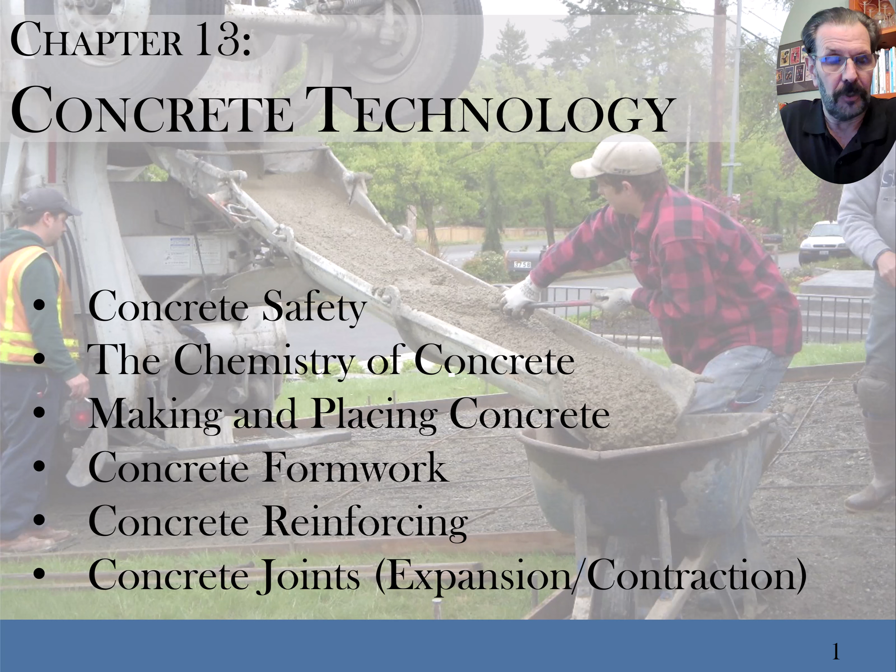Today we're dealing with concrete technology, maybe one of my favorite topics. We'll deal with concrete safety at first, a little bit, mostly in construction safety. Then we'll look at the chemistry involved in concrete—concrete is a chemical reaction. We'll deal with the making and placing of concrete, formwork and concrete reinforcing, and finally the jointing of concrete.

Concrete is not the same as cement. Cement is one of the ingredients of concrete. Concrete is a mixture of gravel and sand, Portland cement, which is the binder, and water. The Portland cement and water chemically react with each other to glue the gravel and sand together—it's the adhesive that binds all these parts together. The strongest concrete mixes have lots of gravel, some sand, and the Portland cement needed to bind all these materials together with the water. But if you add too much water, more than needed for the chemical reaction, you weaken the concrete. So you need a lean mixture as far as water is concerned.

Concrete hardens by a chemical reaction we call hydration. The Portland cement we use is a hydraulic cement, but the chemical reaction is hydration, or sometimes we talk about hydraulic reactions, because it's a reaction with water. There's actually heat generated by this chemical reaction too. It's not very measurable in day-to-day examples, but it is a true thing, and when you're running a very high-speed, quick-setting cement, you can feel the heat.

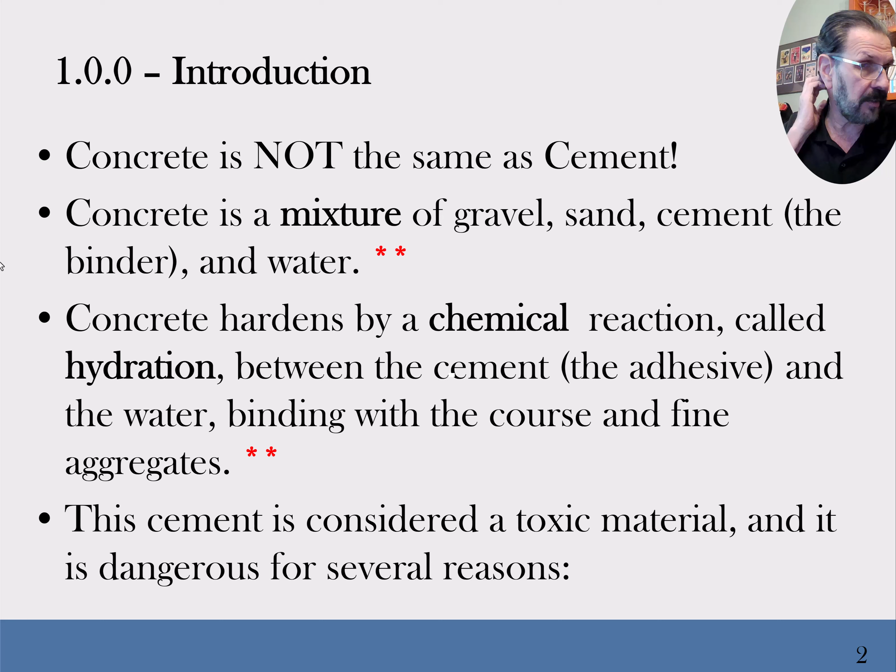Cement, in this chemical reaction with water, is also toxic to our skin, in terms of burning it. For most day-to-day exposures to concrete, it's not a matter of accidentally getting some on your skin—it's if you're leaning into it, if you've got a bunch of it in your boot or inside your gloves and you're holding that against your skin for a period of time, the cement can start reacting with the water in your flesh.

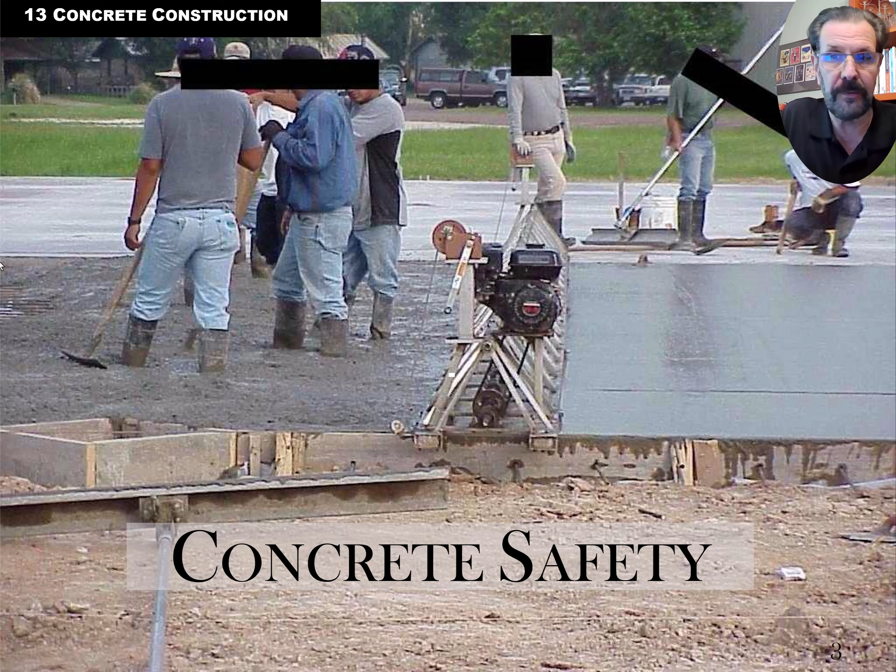Some people get irritant reactions to the cement against their skin, either the paste or the powder, and they call that cement dermatitis. If you're breathing the cement into your lungs, well, there's silica in there. Also, if you're breathing it in through your mouth or nose, where the moisture is at in the back of your throat or in your nose, you can end up getting chemical burns in the nostrils or the back of your throat from the same chemical problem.

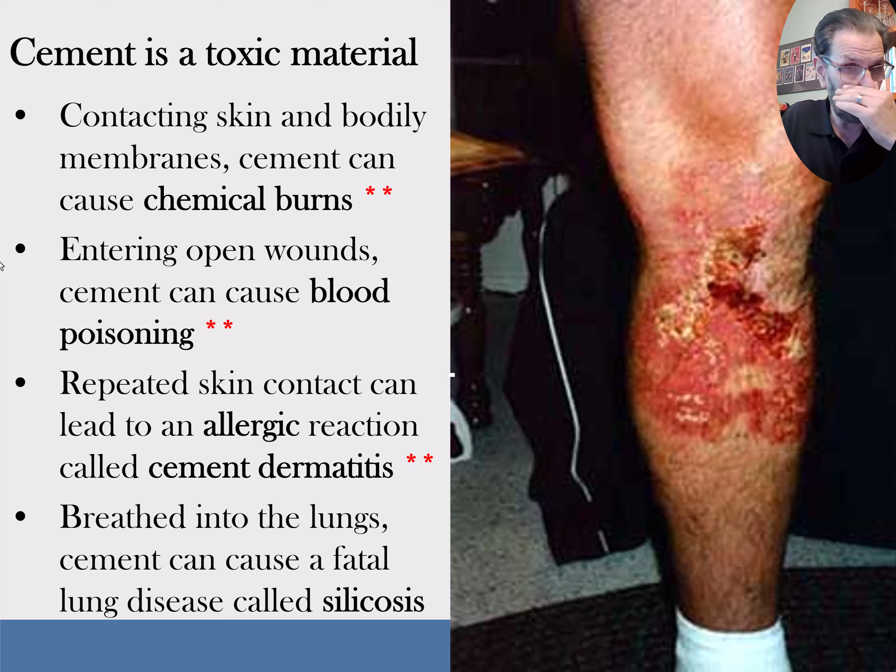And if you get any of this paste in your eyes, that can sting and hurt. So you've got to wear goggles, safety glasses, and maybe goggles depending on what you're doing. A concrete pump, a bucket, a concrete chute, or the vibrator can splash this stuff up into your eyes.

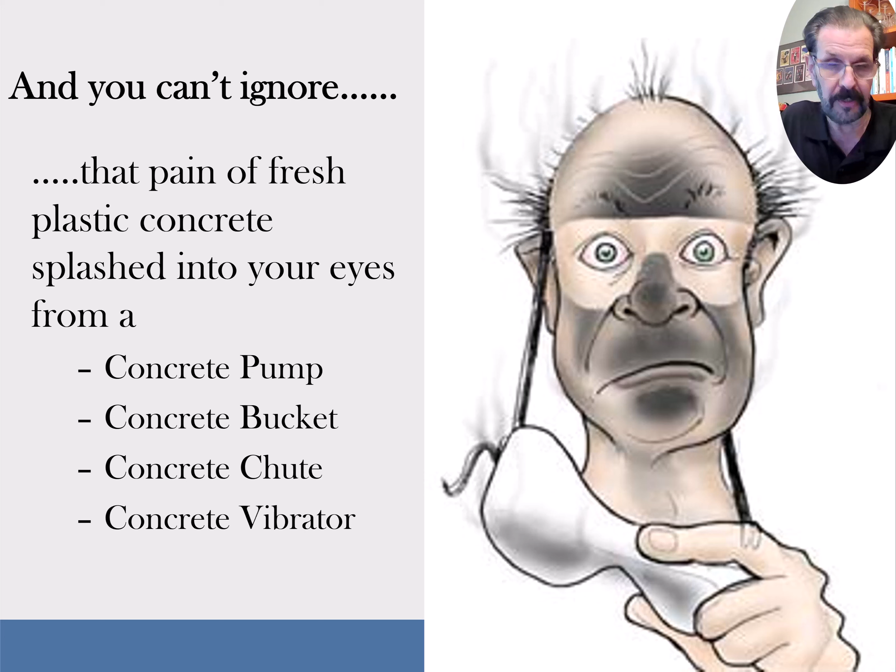The thing about concrete is that it's different than other kinds of activities we do, like welding and steel or woodworking and wood. This joinery is a little different than actually forming material—we go and build these temporary forms that have to be strong enough to support this material.

While it's setting up, it has to be easy to strip, so we need to remove those forms. Looking at these points, the last things about safety I'm going to talk about: the faster the concrete is poured, the greater the pressure on the forms, and those forms can burst. Rebar, reinforcing, you can be impaled by the rebar.

So then you've got the problem there, so we put plastic caps on the rebar. Tilt-up wall panels, lift slabs, precast concrete is all preformed concrete in some way that we're picking up and placing somewhere—what we call erecting the concrete—must be placed and braced properly to avoid collapse. And of course, because it's so heavy, when it collapses, it kills people.

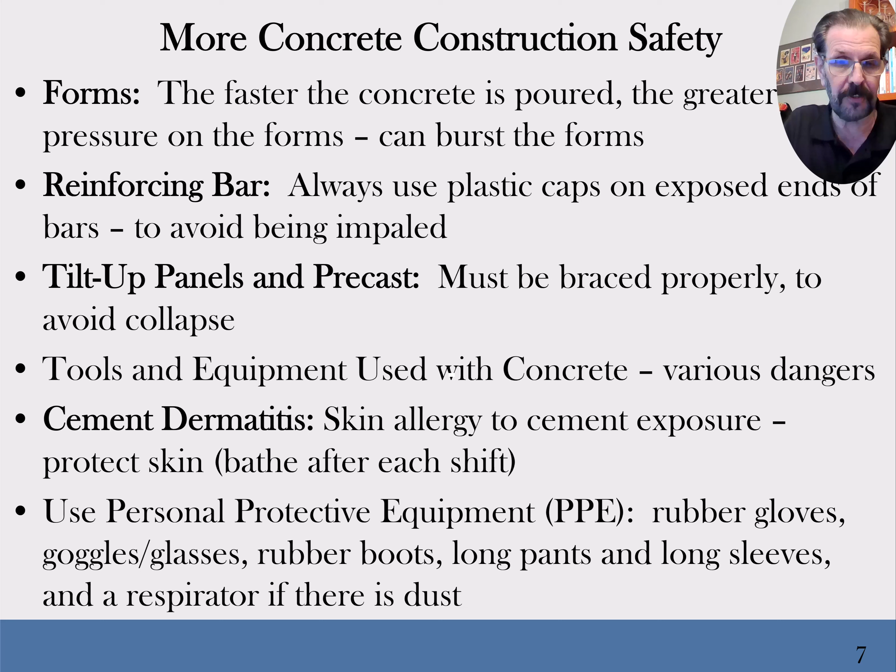Tools and equipment, there's various hazards in there too. We're dealing with unique kinds of equipment, from power trowels to automated vibrating screed systems and placers. And then there's the cement dermatitis that I mentioned. They need to use the right personal protective equipment like rubber gloves, goggles, glasses, rubber boots, long pants, long sleeves, and a respirator if you're dealing with concrete dust, which is full of silica.

One other thing I wanted to talk about here is tremie pours. A tremie pour is normally where we're pouring concrete underwater. The most common way to do this is filling a funnel from, let's say, a chute of a concrete truck, or in this case, a conveyor belt. It flows down into a wall or underwater, trying to reduce the amount of mixing with the water when we're building a foundation for a bridge or something.

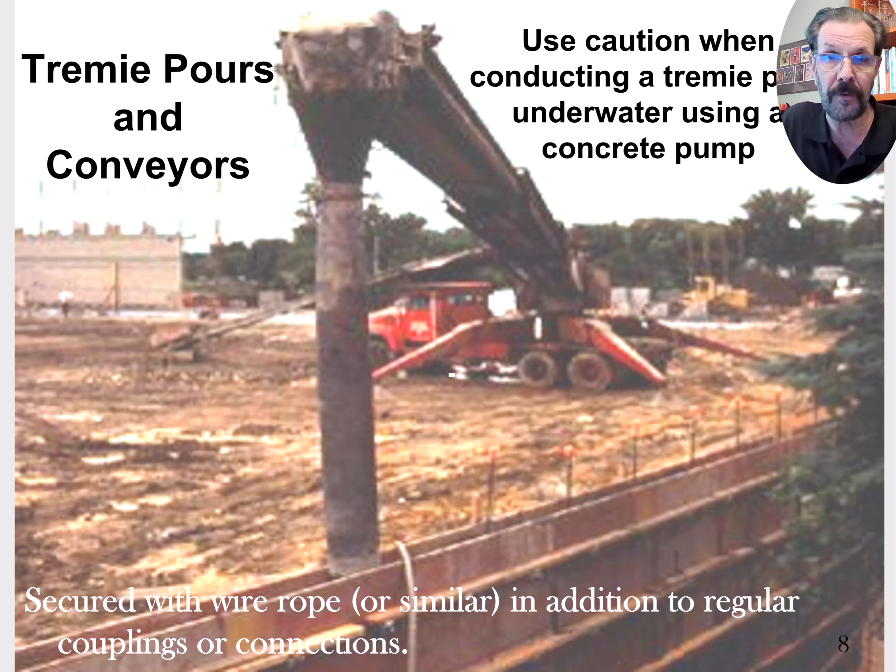But it is possible to use a concrete pump, and that's the one I wanted to draw attention to. Using a concrete pump to pour concrete underwater, the pressures are such that you can launch the snorkel, and if you're hanging onto the handle of the pump to direct it, you could go for a 50-foot ride and maybe strike something or somebody. That can be a very, very serious or deadly accident because of that, so you have to be very careful.

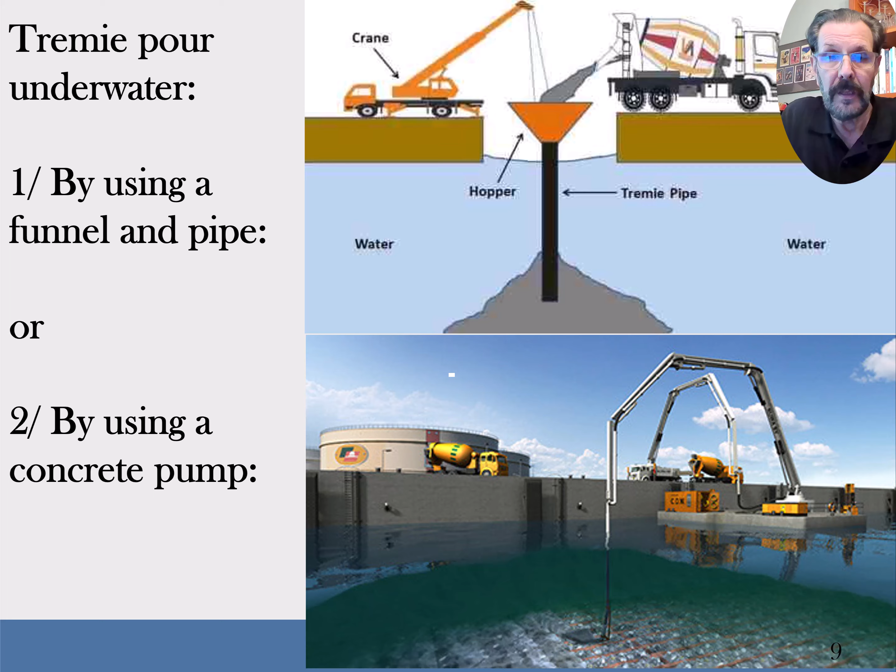Okay, so that's enough about tremie pours. Working with concrete is more complex than working with other kinds of construction materials—there are so many other variables that can throw things off. Slightly different conditions can change how fast and how well a particular mix places that day, how well it finishes, how well it cures, and slightly different conditions can affect how serious the dangers are.

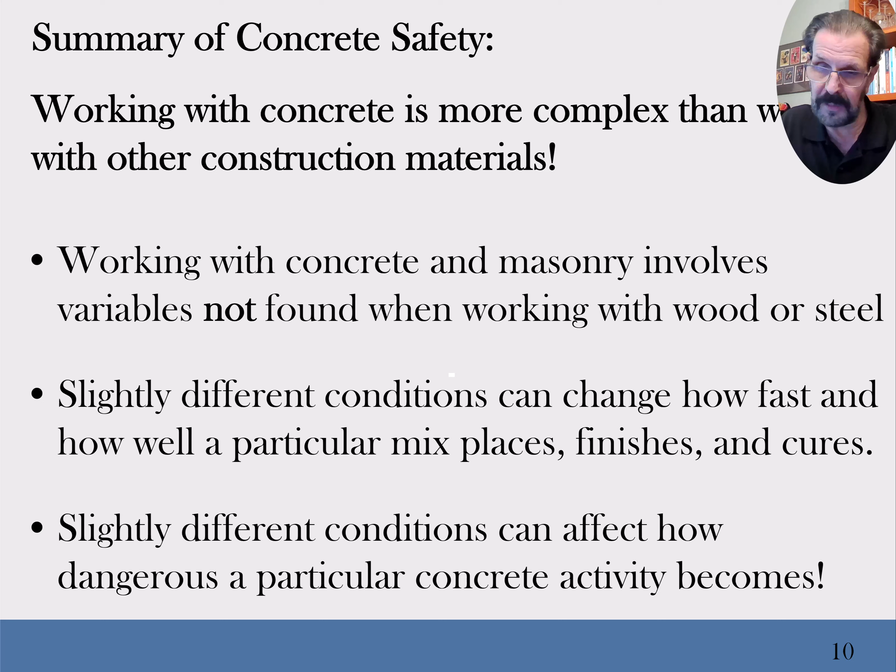Also, when there's an urgency, when the concrete's setting, it's all hands on deck and people start rushing. We're always taught to walk methodically on job sites and not rush, because when you rush, people get hurt. But when you've got the urgency of concrete setting up, sometimes that's thrown to the wind and people start doing haphazard things because of the urgency, and then people get hurt—they trip on things and everything else.

Okay, so the chemistry of concrete—let's look at that a little bit here. I've got more stuff in here than I can possibly go through, but the earliest concrete that we really know of historically, maybe 300 BC—so we're talking about 2,400 years ago—the Roman Empire had an understanding of how to make concrete. Now, they didn't know how to make the cement, but they knew how to find some sources of natural cement, basically from a volcanic ash kind of source.

They were basically using a volcanic ash, mostly originally in some places in Italy, where they could take something with high silica and alumina content, and they made some excellent concrete that's still around today. There were some other cultures around the world that discovered this too.

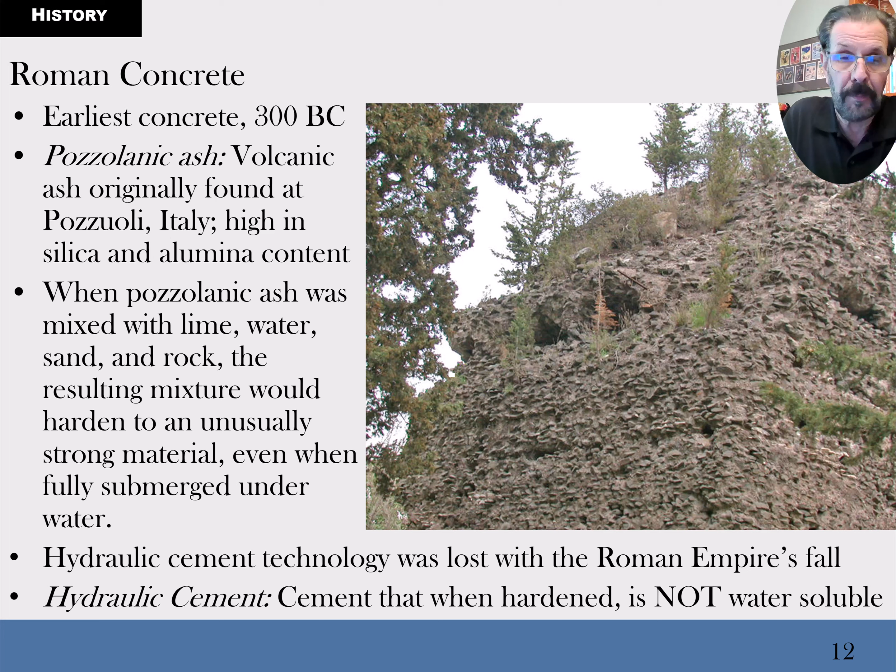So it's hard to figure out who started this whole process, but of course the Roman Empire was huge, so they did a lot of it. But with the fall of the Roman Empire and a lot of these civilizations, a lot of this understanding was lost.

Nobody knew how to make the actual hydraulic cement that we use to make concrete until this guy in England, Joseph Aspdin, patented his process in 1824. He called it Portland cement because there was a rock quarry near where he lived called the Portland Quarry. Portland cement is just his name, and it's used to this day.

We often capitalize it because Portland is a proper town in England, and there are a couple of towns, significant cities really, in the United States, one on the East Coast, one on the West.

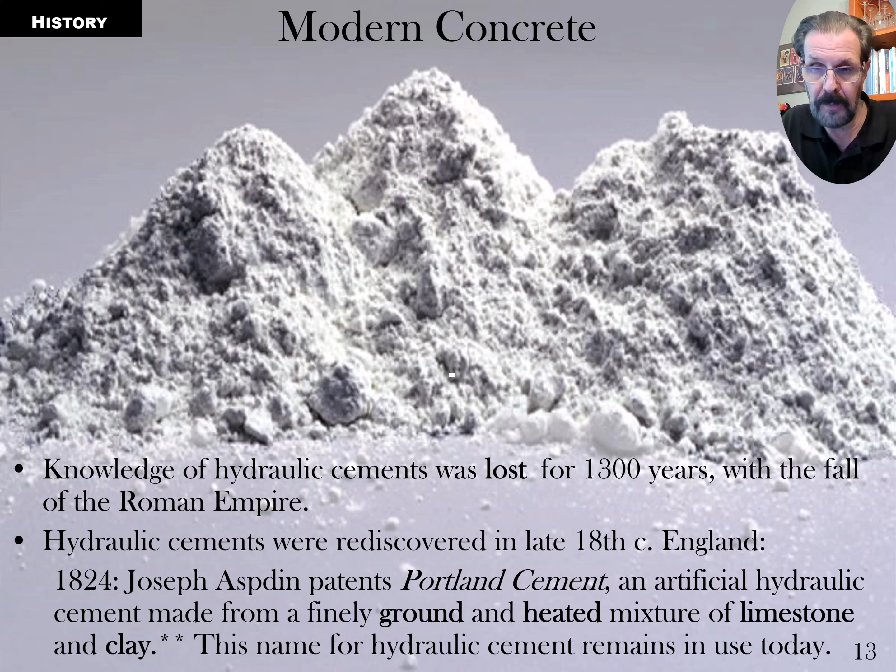Basically, the secret to his success was he was taking all these finely ground materials, very much like the base materials that the Romans were using, but he heated them up to about 2,700 degrees. That's what chemically changed this material so that it actually had hydraulic properties. That's what we use today. We have some varieties to it, but it's all basically that basic principle.

Technology changed a lot in the 1800s. In 1892, a French person, Francois Hennebique, patented reinforced concrete. That's the concept of reinforcing concrete by embedding steel reinforcing inside of it as you placed it. We still use that concept today.

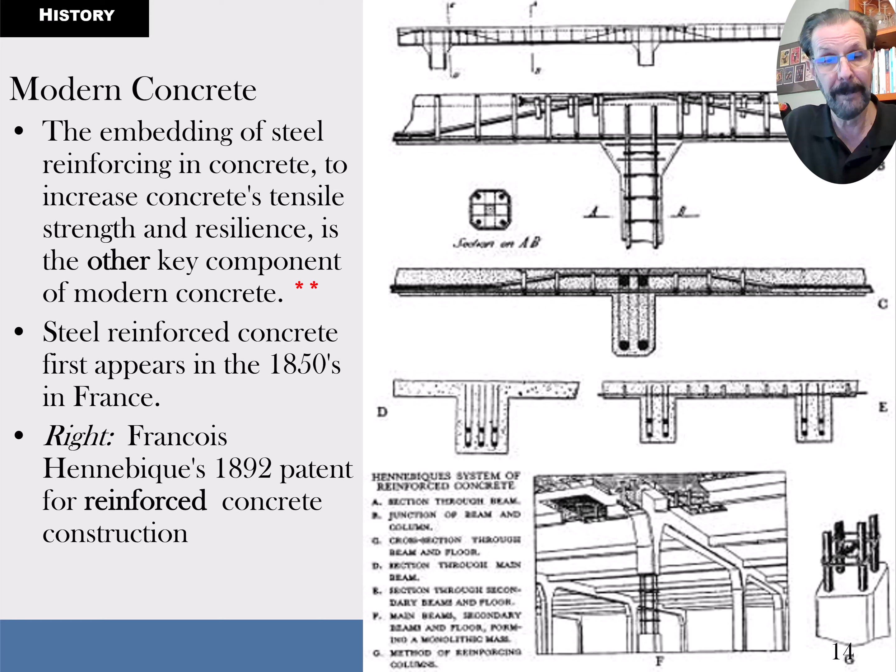Now there are things we've improved upon. They might have just been using simple steel and bonding it. Modern times we put bumps on the rebar so that it binds and bonds better. And of course we've gotten more advanced with post-tensioned and pre-tensioned concrete, where we put the steel under high tension so that it actively compresses the concrete, meaning the steel is actively working.

In modern steel, you've got these bumps on it, and basically all the rebar we have nowadays is round bars. It starts off as round, smooth bar, and then they run it through a machine and put bumps on it by squishing it.

So a half-inch diameter bar might have been exactly a half inch when it went into the machine. When it comes out the other side, it's less than a half inch between valley to valley on the bumps, and from mountain peak to peak of the bumps you get more than a half inch. So when you measure a bar, you have to take a bit of an average.

In this picture on the left, we're looking at two mats, or two walls—we call them mats often in construction, even when they're vertical like this—of steel in this wall. In the upper right-hand picture, we've got two horizontal mats of steel.

A lot of times in your experience in construction, you may find jobs where they only use one mat. In a 4-inch thick slab for a house, for instance, a slab on grade house or a driveway, when you're only pouring 4 inches, there's not enough room for more than one mat. We need to get it up off the ground, and you need about an inch and a half of coverage on both sides. So by the time you have, let's say, two half-inch bars together in a 4-inch slab, and you need an inch on top and an inch on bottom at least, there's no room for another mat.

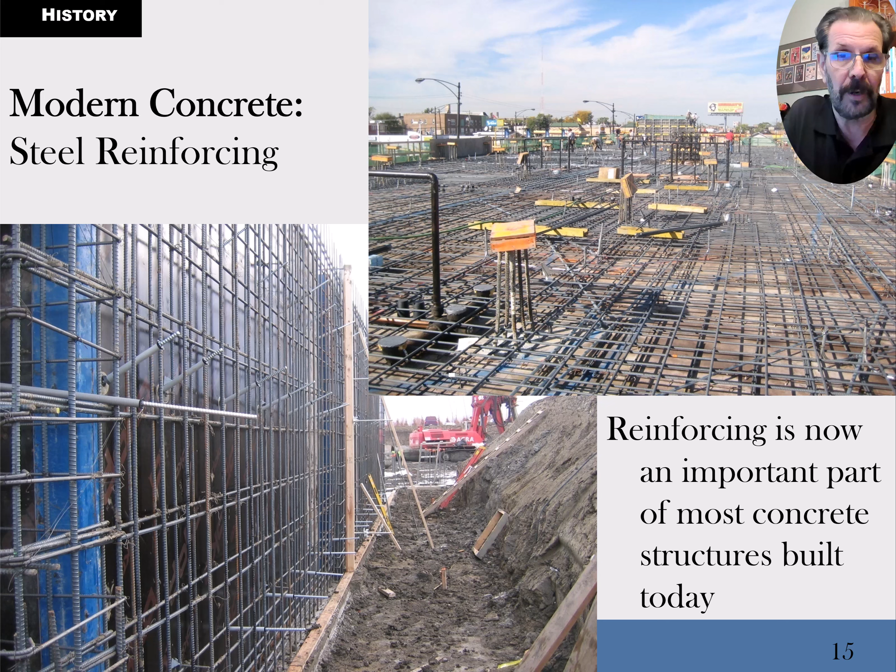And that's why we put it in the middle, and it works half as well as it would otherwise. But it's far better, when you've got thicker concrete, to have a mat closer to one side and another mat closer to the other side. You need a certain amount of coverage around every bar.

But anyway, I'm getting off topic, so let's move along. When we look at the ingredients of concrete, there's the fine aggregate, that's the sand, and the coarse aggregate, that's the gravel, which we talked about back in the foundations chapter, chapter 2. The coarse aggregate is the largest ingredient in concrete, the second largest amount is the fine aggregate, the sand, and the third largest quantity is the Portland cement. The water is the least of those four basic ingredients. So the basic four ingredients of concrete are the gravel, the sand, the Portland cement, and the water.

So you might have, let's say, 1,800 pounds of gravel in a cubic yard of concrete. You might have 1,300 pounds of sand in a cubic yard of concrete. You might have 500 pounds of cement in there, maybe 250 pounds of water. So we measure the ingredients by weighing them.

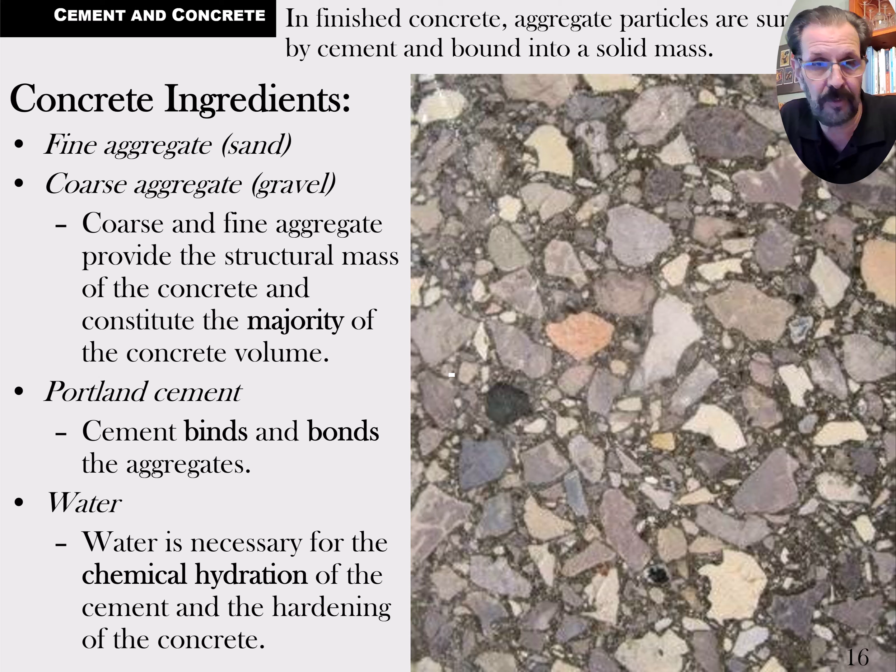Typically in a ready-mix plant, when they're mixing the concrete into a ready-mix truck, they're mixing up the ingredients by weighing them. So in this slice here, the larger nuggets you see would be the gravel, and then there's some smaller nuggets getting down into the category of sand particles, and the gray mass in between the sand particles is really the cement paste.

The cement comes from a mining process of getting calcium silicates and lesser amounts of compounds like aluminum, iron, and magnesium. They take raw materials from sources like limestone, chalk, marble, sea shells, clay, shales, sometimes industrial waste materials, iron ore, bauxite — all kinds of ingredients are part of this. But basically, the main thing is we've got a whole bunch of calcium silicates that are part of this, and they grind it up into smaller and smaller particles.

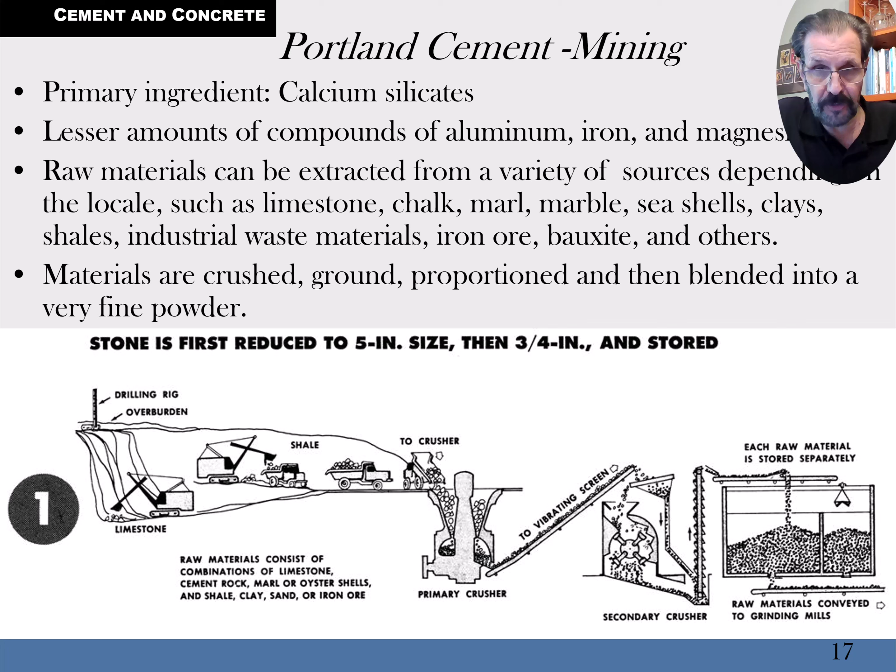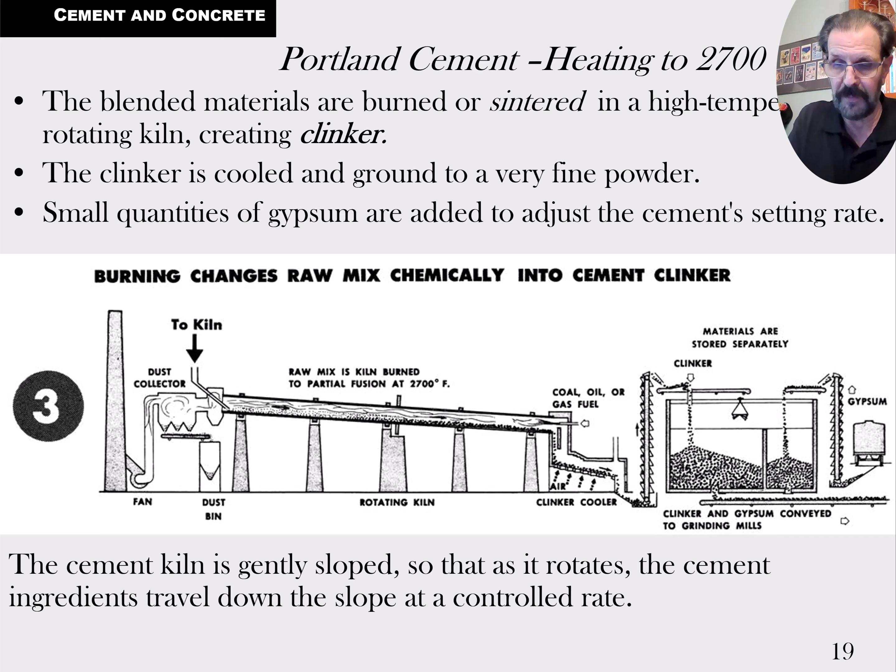And then eventually they run this stuff through a ball kiln, where they basically have ceramic balls rolling around in a big rotating pipe on a subtle, slow angle, so that as it's rotating, it keeps the material from caking up as they heat it to about 2,700 degrees. As it comes down the other side and cools off, it's still all about keeping it from caking up. Eventually it's collected at the other end and put into either bags or a bulk truck, a bulk car, a box car.

And a lot of the stuff, in order to move it, they pump it. But of course it's a powder, so they're really just vibrating it and blowing and pumping it in various ways, mostly by vibrating it, keeping it airborne, and moving it almost like a liquid — but it's all just a big bunch of very, very fine powder.

Now, you should know the standard weight of a standard bag of Portland cement. Some of you may have worked with pre-mixed concrete bags that already have the gravel, sand, and Portland cement in them. The standard weight of the full-size bag of pre-mixed concrete, without the water but everything else, is 80 pounds. There's also a 60-pound bag, or you can even find a 40-pound bag, but the 80-pound is probably the most common. At the home center, a 60-pound bag is pretty common too, because it's not so heavy to pick up and move for some of the less athletic customers. But that's different from a bag of Portland cement.

A bag of Portland cement is one cubic foot of volume, and so it's exactly 94 pounds. I say that, but there are some varieties of Portland cement that could be 92 pounds — but we're going to stick with one number to keep it simple. That's what traditionally, in all the textbooks, they refer to as the weight of a cubic foot of Portland cement, which is what a bag of Portland cement is: 94 pounds.

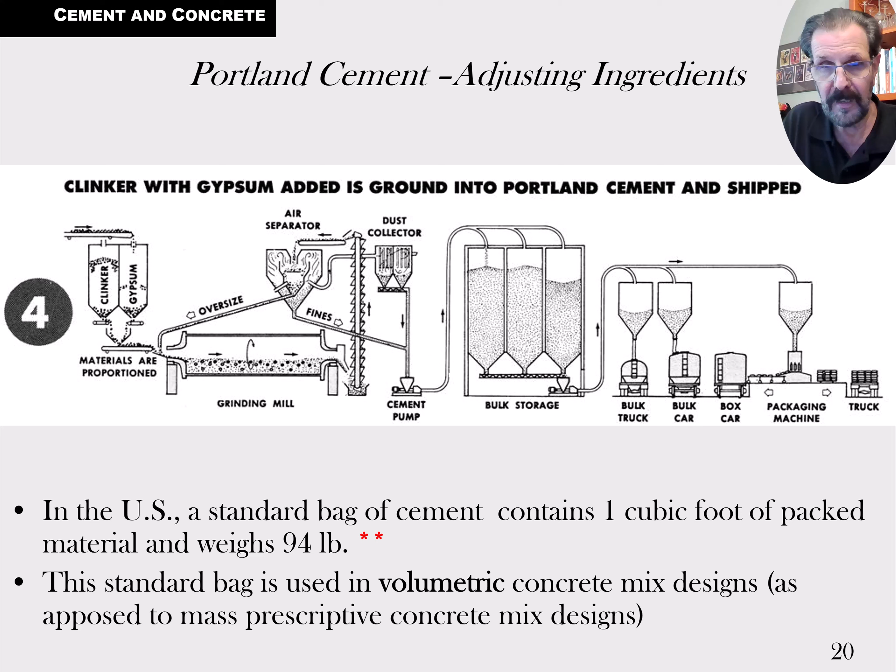Remember that a cubic yard of anything, whether it's concrete or Chuck E. Cheese balls, is 27 cubic feet.

These are what we call air entrainment. We artificially add air into a concrete mix through an additive that creates these tiny, creamy air bubbles. I say we do it, but we don't really do it a lot in Louisiana, because the main reason for air entrainment in a concrete mix is to protect the concrete from freeze-thaw cycles over the years, long after the concrete's set up. Having those little tiny air bubbles is like having little cushions, little airbags or something. I don't quite understand the concept in my head, but they've proven this helps make concrete bridge decks more durable to the freeze-thaw cycle in the wintertime in places that have that issue. We just don't have that issue enough here to worry about it in Louisiana, so we don't tend to use a lot of air entrainment.

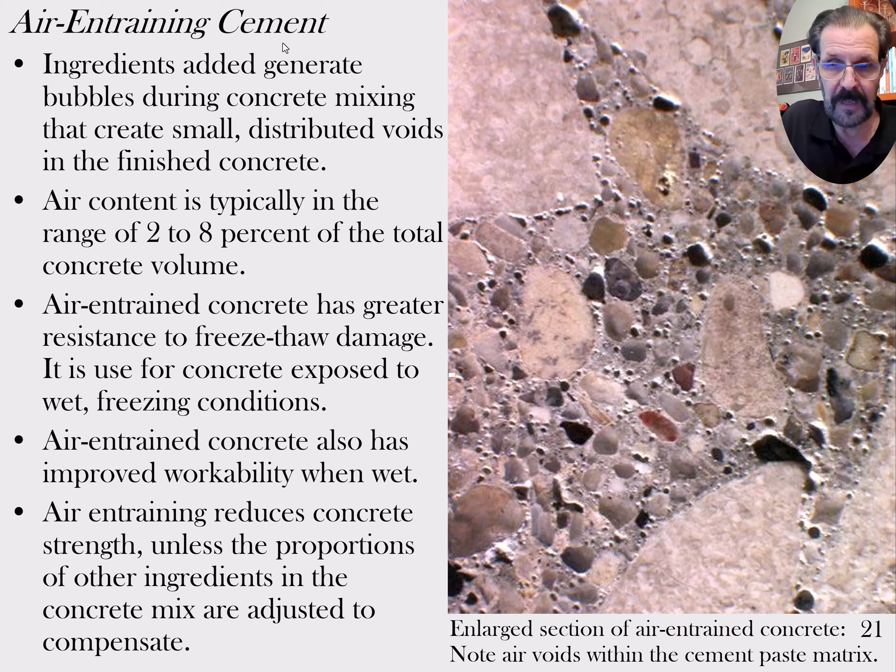But in all the concrete that I've had anything to do with mixing -- and I started early and did a lot of it, many thousands and thousands of cubic yards of concrete that I've mixed or placed or both --

We've never used any of these type 1A, type 2A, type 3A. We use a separate additive that we would add to the mix instead. So this is just a thing, but anyways, type 1, you should know that's type 1 normal.

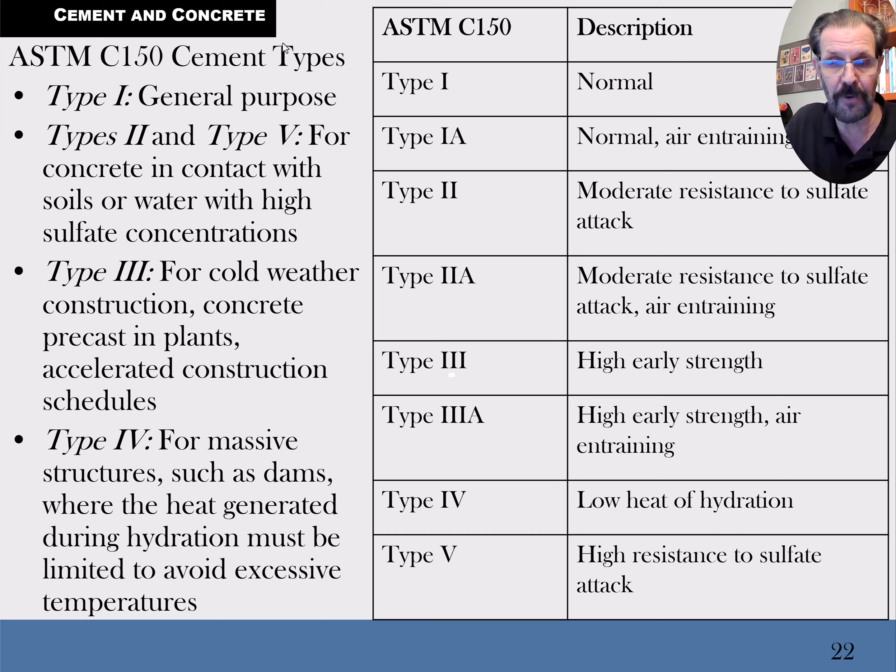When we were dealing with masonry cement, we had the different types of masonry cement. That was all about the amount of hydrated lime mixed into type 1 cement. So all masonry cement is type 1 normal cement with different amounts of hydrated lime. We had M, S, N, O, K for the different types, those were all alphabet letters. Here we're using Roman numerals, so in cement it's all type 1, 2, 3, 4, and 5, all in Roman numeral form. Okay, so that's enough about that.

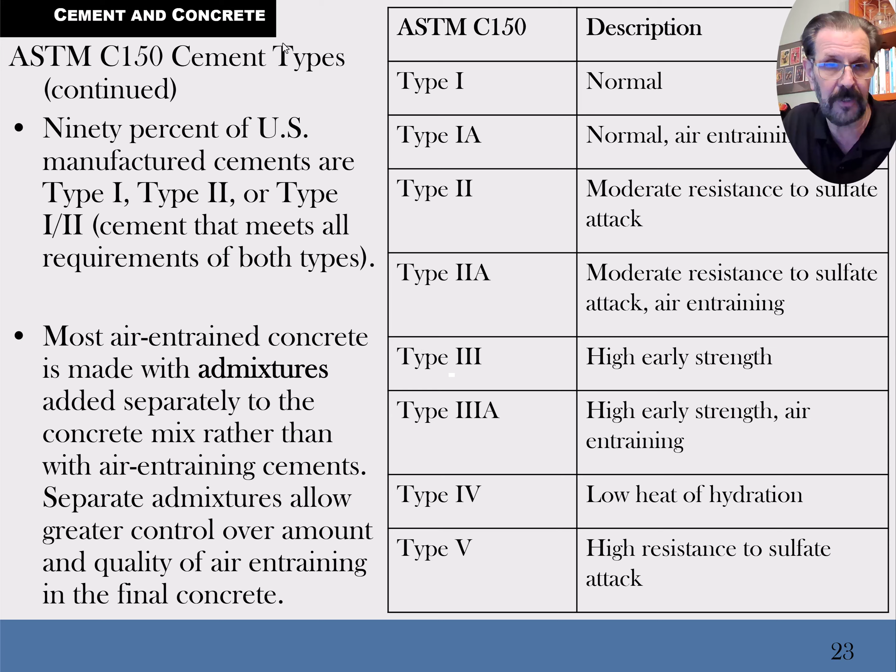90% of the manufactured cements that we use generally are in the type 1/2 category. Now, there's about 900 pounds of carbon dioxide created into the atmosphere for every 1,000 pounds of Portland cement that's created at a cement factory that makes Portland cement, so almost a 1-to-1 relationship.

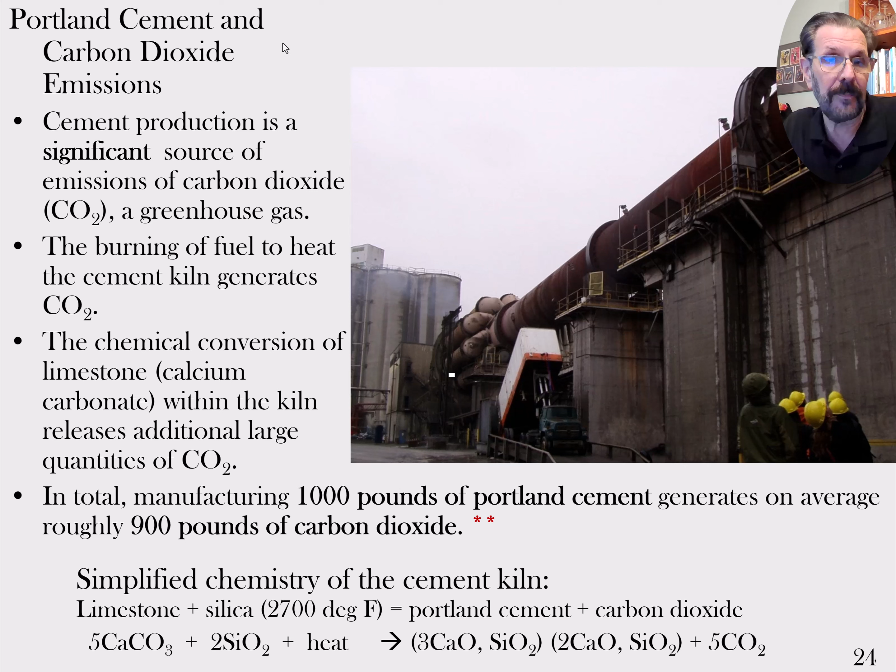There is an environmental concern here. They're getting better and better every year at capturing that excess carbon dioxide to keep it from going into the atmosphere, but it has traditionally been a problem with these additional greenhouse gas releases. So it's something to be aware of, but they're trying to address it.

So when we make a concrete mix, we're trying to fill the voids between the gravel particles with sand, then fill the voids between the sand particles with Portland cement, and then fill the air voids between the cement particles with water. If you get an unbalanced mixture, too much water fills beyond those voids. The same is true if you get too much sand, filling beyond the voids between the gravel particles. So different mix designs give you different results.

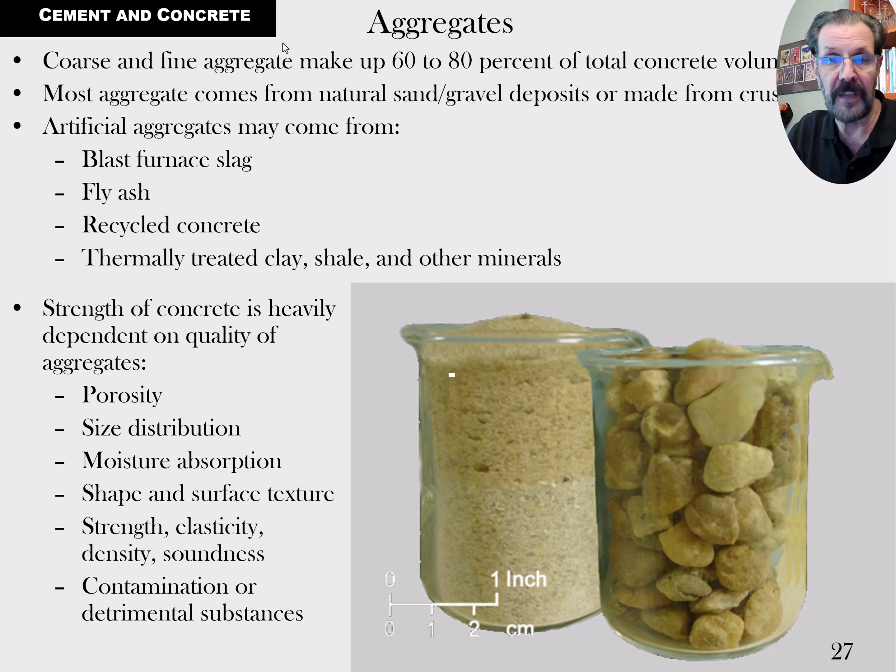But at a precast concrete plant, they've got steel forms and can vibrate the mix into submission. They can work with a much harder mixture and place it because of the equipment they have, which isn't easy to use on a regular job site. If you're using wood forms, they can only be vibrated so much before you start to burst them, and you always have to worry that if you vibrate too much, you can separate the ingredients. So there's a lot to this.

Okay, so it's not particularly useful information, just something you may hear on a job site someday.

The point here is that if you've got a bunch of steel that's so tight, you'd have a hard time getting certain kinds of concrete mixes to flow into between those steel particles. So we have to choose the mix design that works for the application.

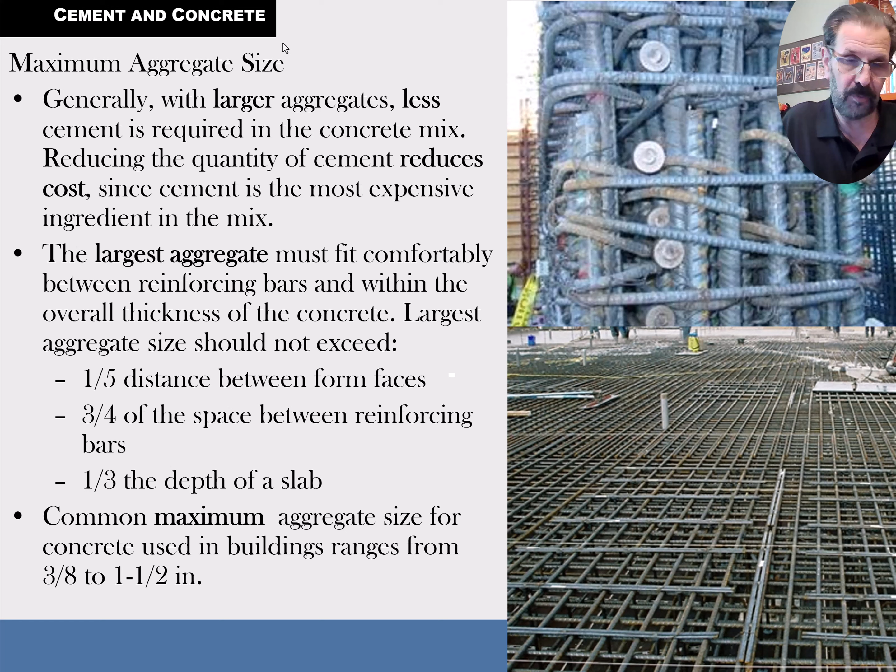Common maximum aggregate sizes for concrete mix can range from 3/8 pea gravel up to 1.5 inches for the largest gravel size. When you buy gravel, it's usually named in relation to this—it could be a 3/4 minus mix, meaning the largest aggregate size is 3/4 inch, and it's well graded all the way down to smaller gravel sizes. Or it could be a 1.5 inch minus mix, where the largest nugget in there is 1.5 inches.

The mixture between sand and gravel changes the strength of the concrete, basically, as it fills the voids.

There's also lightweight concrete, and that comes from having lightweight aggregates. Structural lightweight concrete will be roughly 80% or less of the weight of normal concrete. So if normal weight was, say, 100 pounds, and you got 80 pounds of that—well, it's going to be more like 150 pounds being a common weight for concrete.

So to see 80% of that in my head would be 80 plus 40, that's 120 pounds. So yeah, 120 pounds. You can kind of see it on the graph here—normal weight concrete, then stepping down to structural lightweight concrete in the 120 down to maybe 100 pound range.

By the time you get down to insulating or fill concrete, you're using volcanic aggregates. And when you get down to the very lightest of concrete, you've got vermiculite and perlite—human-made kinds of aggregates that are used, like popcorn weight, real light.

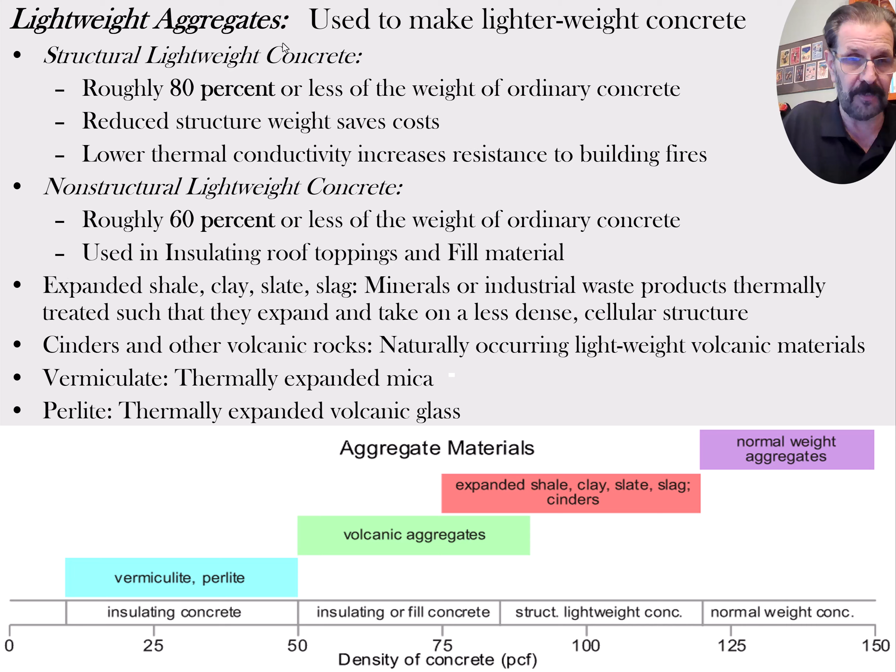Water, if you can drink it, you can certainly use it to make concrete with, but you can also take the wastewater from washing out a ready-mix concrete truck and recycle that into making concrete. So that's sometimes done, and that's not something you'd probably want to drink.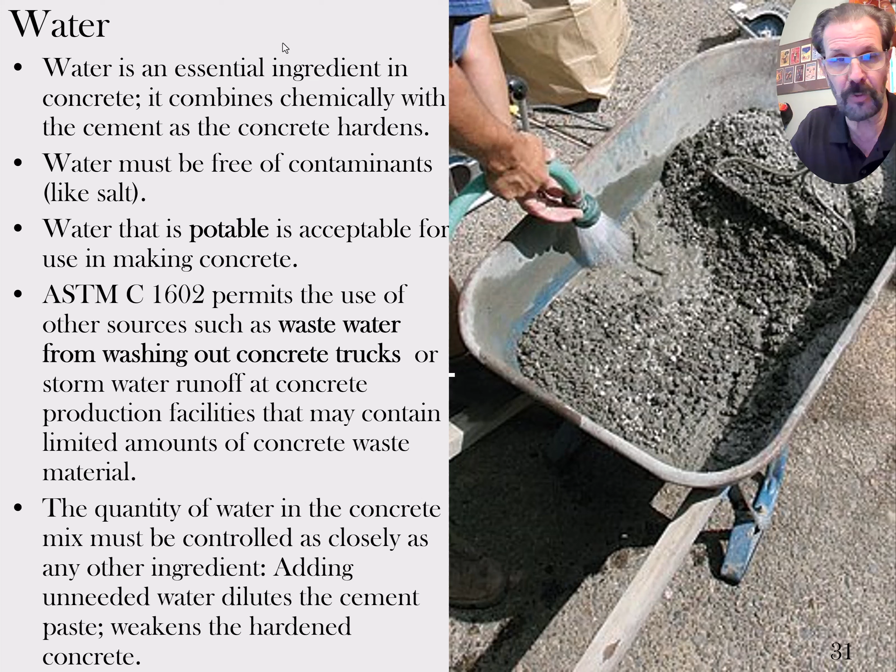Then there's something—this is a mouthful—supplementary cementitious materials. These are materials added to concrete as a partial substitute for the Portland cement. Some of the best ones actually have cementitious properties, basically hydraulic cementing properties like Portland cement at some level.

And then there's some that are more about workability, kind of like hydrated lime is in mortar. You can have some supplementary cementitious materials that aren't really adding strength so much as they're adding workability, which could be important. So the hydraulic cements generally are intrinsically adding strength to it.

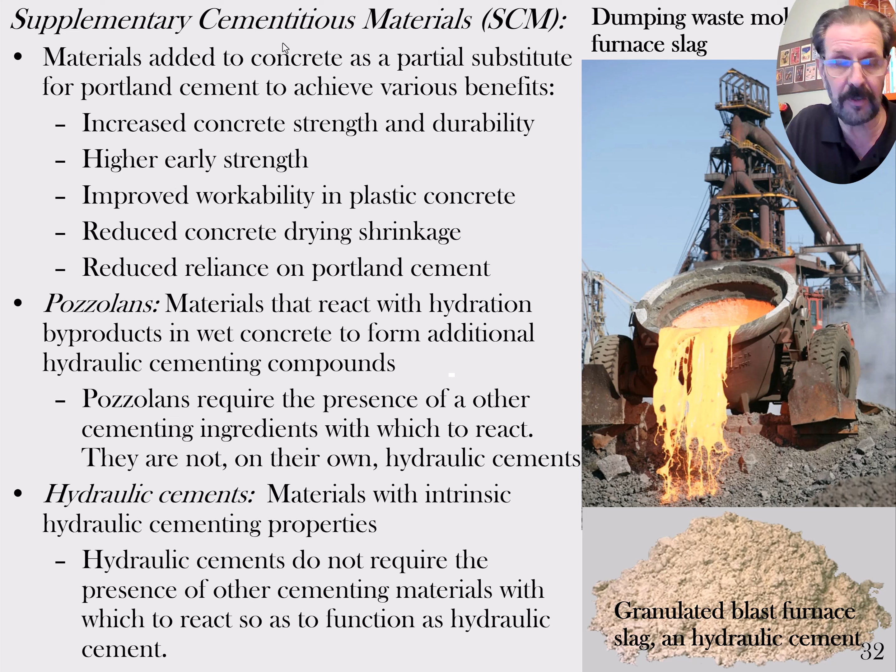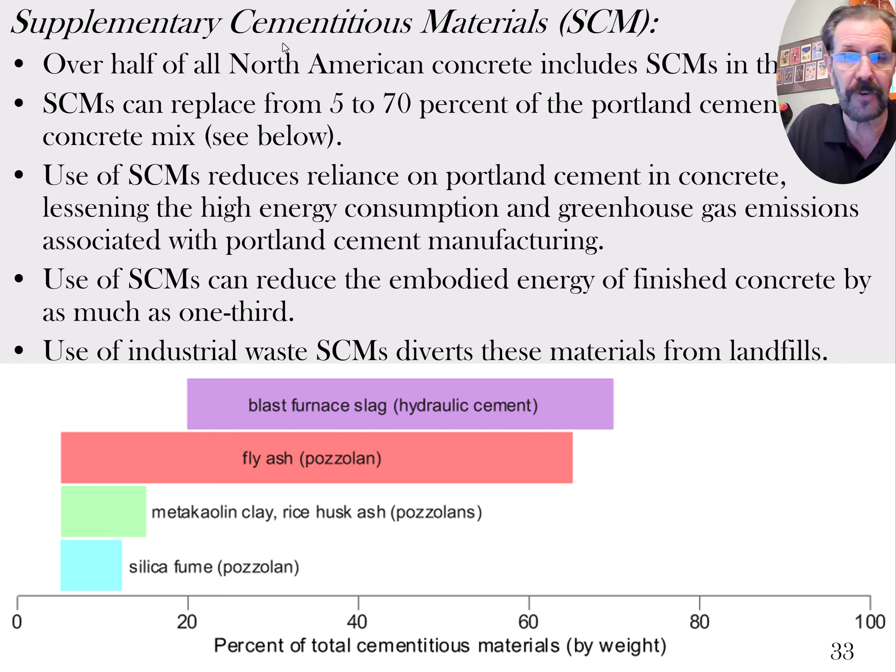Anything beyond those four basic ingredients—the gravel, the sand, the Portland cement, and the water—anything else is considered an admixture, including really the supplementary cementitious materials I was talking about.

The air entrainment I've talked about, but you can buy a separate additive that can be poured into the back of the truck, usually in a liquid form. There's a water reducer—there's a couple different kinds, well, several really. The cheap poor man's water reducer would be Dawn dishwashing liquid or Joy soap that you'd use to wash dishes in the sink, the liquid soap.

There's cure accelerators that speed up the concrete set. The poor man's version would be a type of salt—most commonly we use calcium chloride. It is salty to taste because it is a salt, it's just not the same as sodium chloride. Salt is by definition the residue left behind when an acid and a base chemically react with each other. So there's sodium chloride, calcium chloride, potassium chloride—these are all types of salts out there. So the one we call salt is not the only one.

Now then, a cure retarder slows down the set. The cure accelerator, like calcium chloride, speeds up the set. We do that in wintertime concreting in cold climates because we're trying to keep the concrete from freezing before it gets a chance to get strong enough to deal with the cold weather. The retarders we're more likely to use down here to slow down the set of the concrete. The poor man's retarder is sugar, mostly in the form of molasses or maybe even cane syrup.

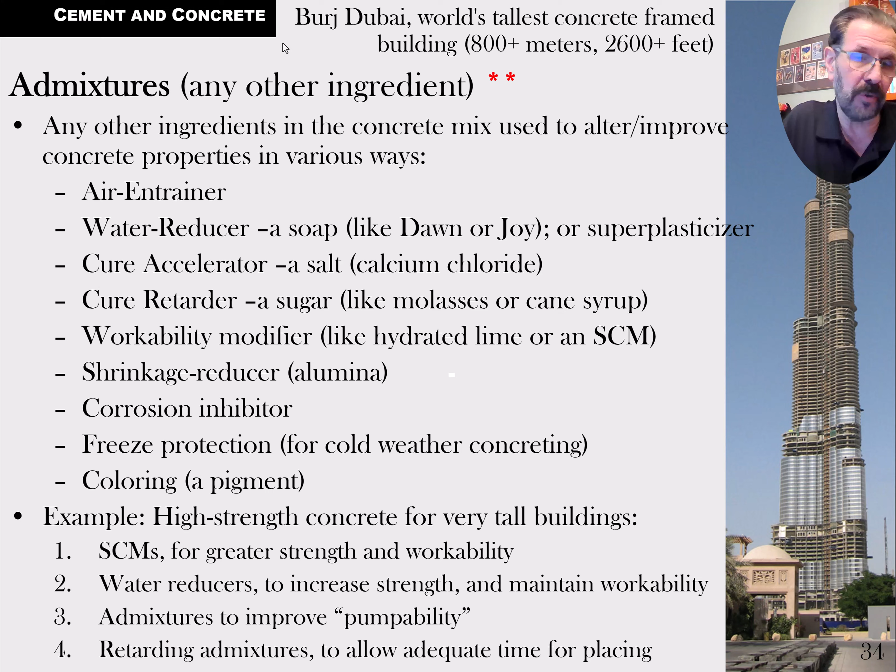The weight of ingredients, the main one I want you to know is the weight of the bag of Portland cement—I've got it listed up here again. These other weights are kind of useful to know, but I'm not going to be testing you so much on them. I think it's good to know that concrete weighs somewhere between 140 and 150 pounds. When it's freshly mixed, it's closer to 150 pounds. After it's set up and has less water in the mix, it ends up weighing closer to 140 pounds, just like asphalt is in that same neighborhood too.

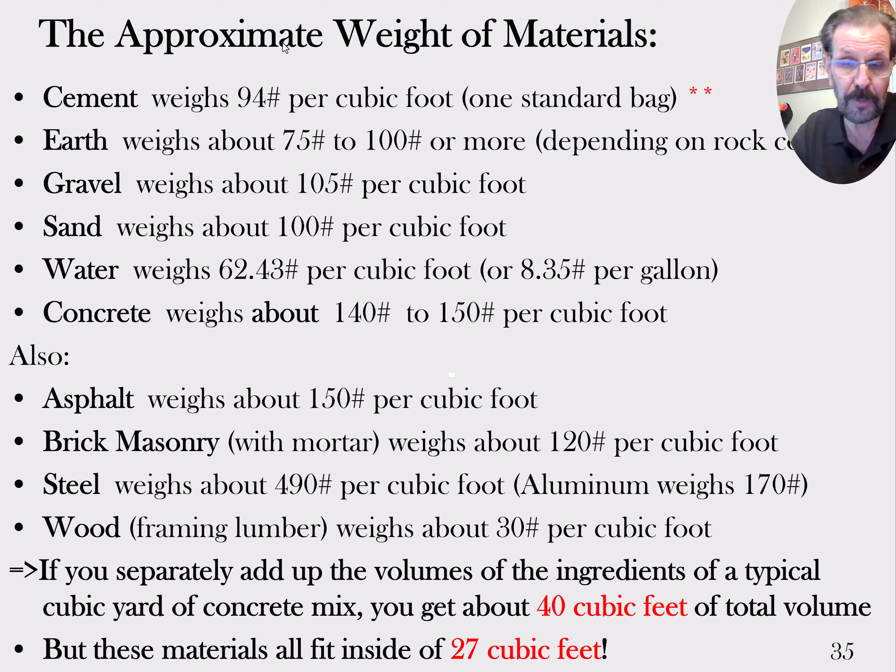The red text at the very bottom could be turned into a test question. It says, if you separately add up the volumes of each ingredient of a typical cubic yard of concrete, measuring the gravel, sand, Portland cement, and water separately, you get about 40 cubic feet total. When they're all mixed together and fill each other's air voids, you end up with 27 cubic feet of material in the end. So 40 cubic feet separately becomes 27 cubic feet once mixed together—one cubic yard. It becomes much denser because those ingredients fill each other's air voids. It's kind of a fun fact, I guess you'd say.

The outmoded volume metric, or volume proportion mix design, could typically be a common mixture of 1 to 2 to 3, where 1 part Portland cement goes to 2 parts sand to 3 parts gravel. That's like 1 shovelful of Portland cement and 2 shovelfuls of sand, and the third would be the gravel, sometimes mixed together. When those are all mixed, they fill each other's air voids and you've got your concrete mix. And of course you also need the water, which might be a half a shovelful or less.

But anyways... yeah, let's see here. How am I doing on getting through this material? Yeah, okay, so that should be fine. 47 minutes, let's see.

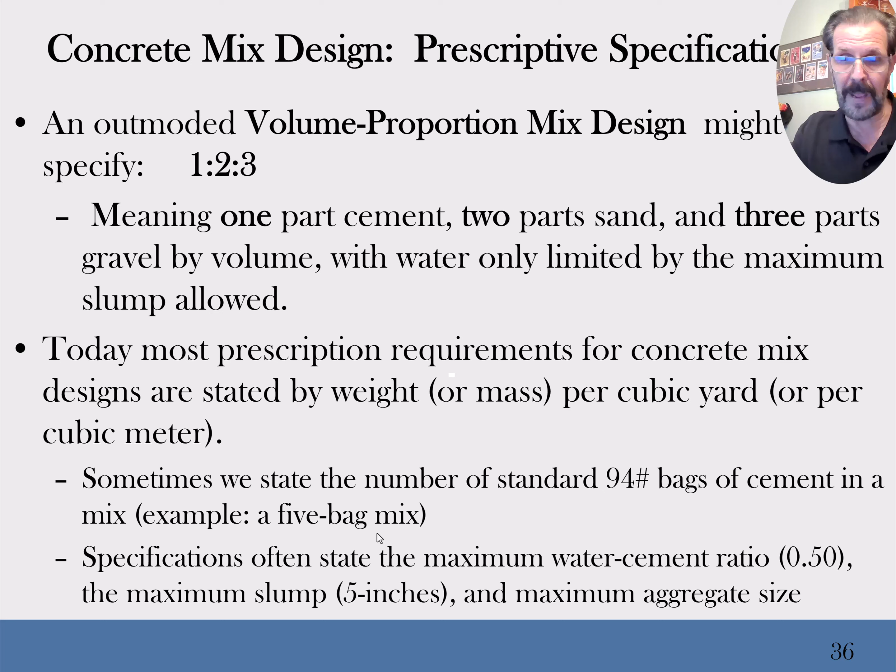So that's when we're dealing with volumetric mixes, but nowadays most concrete mixes are done by a prescriptive method, weighing the ingredients, as I've mentioned before. There are also specifications for concrete mixes where we measure the water-cement ratio—the weight of the water divided by the weight of the cement. At the last sub-bullet at the bottom of the page, specifications often mention a maximum water-cement ratio of 0.50, a slump of 5 inches, and a maximum aggregate size, as part of the mix design.

I've got a mix design right here I was going to show you, though you can't read it very easily on this page yet. I'm going to zoom in on it a little bit. This mix is considered a 3600 psi class mix.

What I mean by that is if you don't treat the concrete well—the way most contractors treat it—you're probably going to end up with 3600 psi concrete. But if you do proper moist curing, keeping the concrete from drying out for the full 28 days, you can end up with 5380 psi concrete instead. That's like 50% more strength because you spent time talking to it each evening and caressing it and making a friend of it—no, I'm making that all up, bad joke. But moist curing really does mean keeping it from drying out for 28 days.

So that's crazy talk, nobody can do that. Well, I've seen a few cases where it's been done. I know of cases like that, and it really did change the whole arc of that concrete—it made it much, much stronger. You end up with a higher strength concrete in that case.

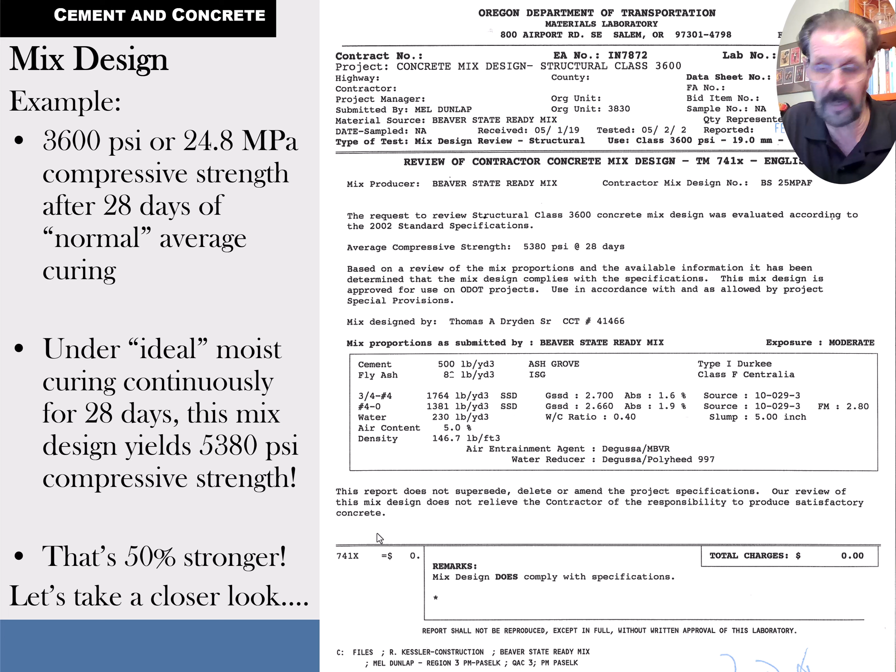So here I am looking at that same sheet. I'm trying to get to it, but it's not letting me. Okay, so I'm zooming in from here a little closer, and you can see now, can't really show you with a cursor here, just not working.

But the class, if there is one, is up at the top under the first double line you see at the top, it says class is 3,600 psi. If you look down in the middle of the next section, it says the average compressive strength is 5,380 pounds per square inch, psi for pounds per square inch, at 28 days.

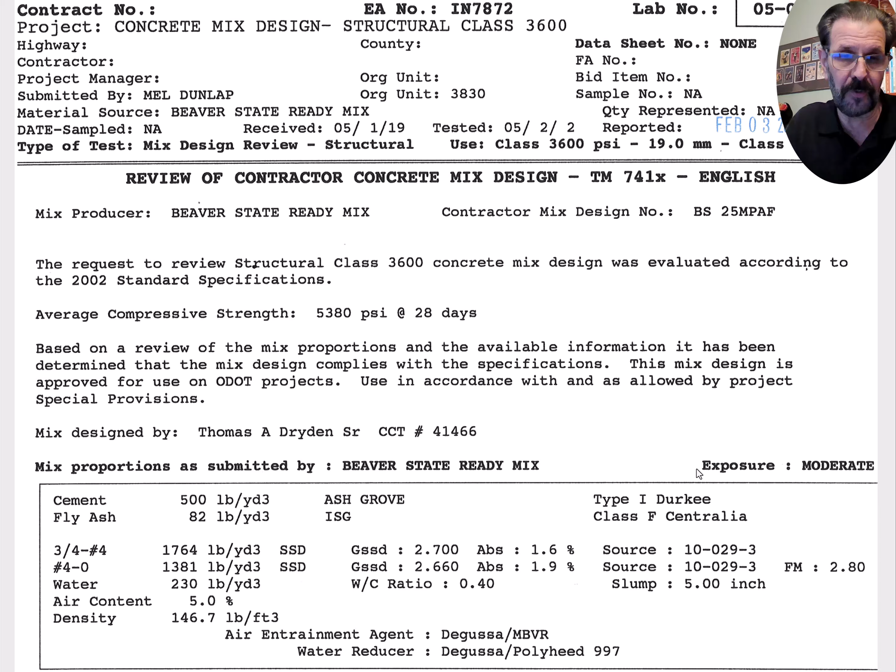Now that box down at the bottom where it says cement and fly ash and 3/4 to number 4, number 4 to 0, water, and so on - the point is those are the ingredients in their proportions. So let me come to that. I'm going to zoom in just to that alone.

So in this mix, this is a 1 cubic yard mix. So for every cubic yard, you have 500 pounds of Portland cement. Now notice the fly ash, that's a supplementary cementitious material. They've got 82 pounds, that's their maximum. And that's somewhere around 7 or 8%, I think, of the cementitious materials would be fly ash.

Okay, now there's a space and they go down to the next line and you got 3/4 to number 4. That's the gravel. So it's 3/4 minus mixed down to the number 4 sieve size or screen size, and that's defined as the gravel. They got 1,764 pounds of it there. And then meanwhile, below that, they've got number 4 down to 0, that's the screen sizes in there, and they've got like 1,380 pounds of sand.

And then the water, it's measured as 230 pounds. Now, they might not always weigh the water because they can look at volumes, but it would equate to about a certain number of gallons. A gallon of water weighs about 8 1/3 pounds. And so you could figure out how many gallons that is by doing a little math on that.

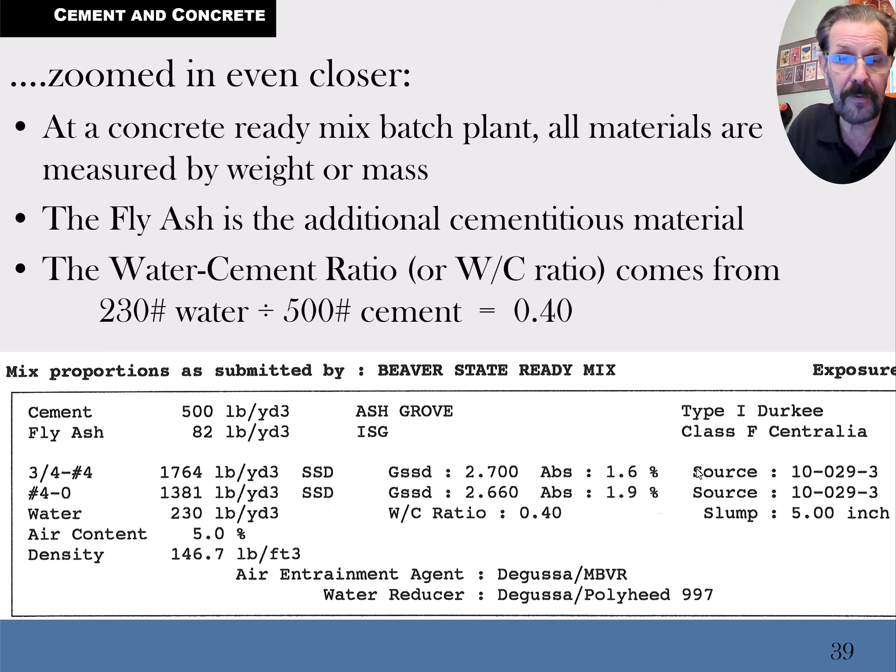The weight of the water in this mix divided by the weight of the cement, 230 pounds of water divided by 500 pounds of cement equals 0.4. So the higher the number, the weaker the concrete. Because think about the ratio, it's going to become a bigger number if you're adding more water to the cement, right? So a lower number is a good thing. 0.4 is a pretty good number. And then you might have some jobs where they require you to be down to 0.3 or 0.35 or something like that.

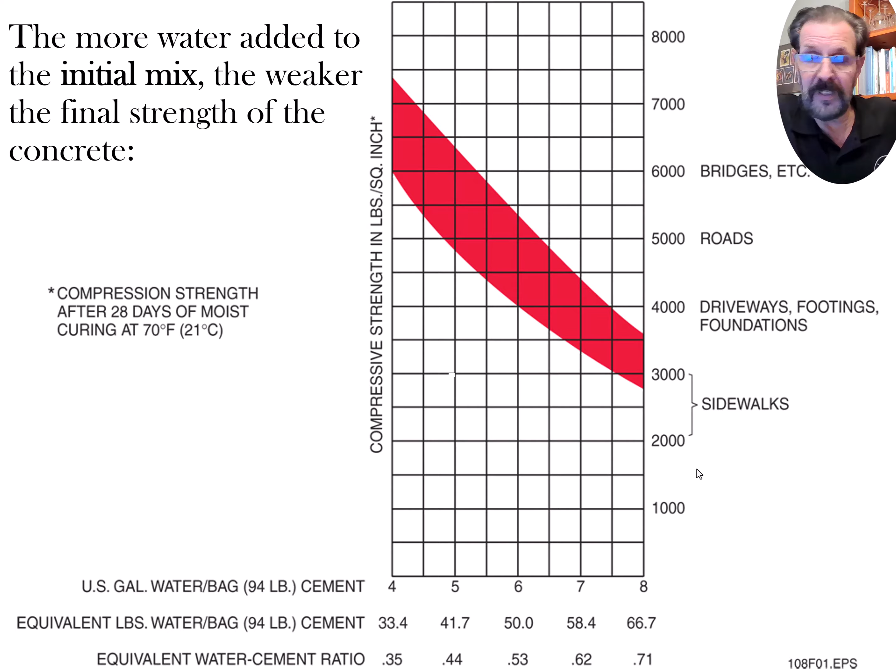So too much water added to the initial mix makes the concrete weaker because it leaves behind air voids when the water is gone, when it's evaporated away or leached away. Too much water in the initial mix, but not enough water in the mix at the end. Once you place the concrete and it's starting to cure over the days and weeks, you want to keep as much of that water as you can in the mix.

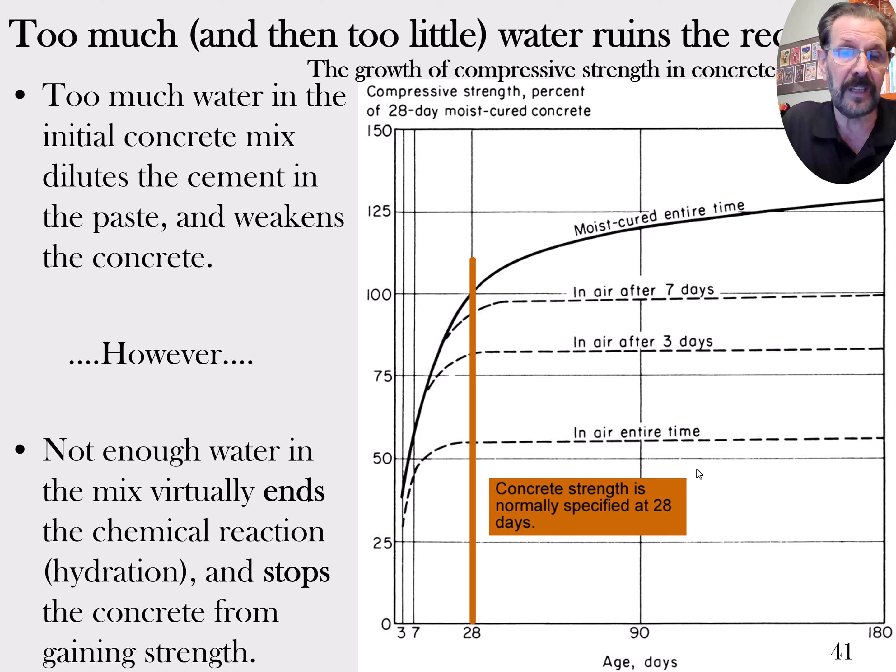So these arcs are showing you that. In fact, what you can see here is the solid line is talking about being cured the entire time and how it keeps getting stronger. If you were to go the full 28 days and then give up on moist curing, that's going to change the strength too. But notice you're getting most of the strength if you can keep it moist cured for 7 days, and you're getting a lot of the strength if you can keep it moist cured for 3 days. So it gives you an idea.